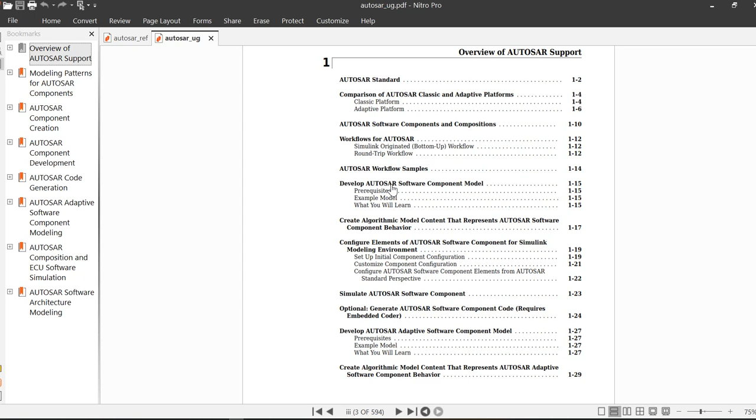Then the AUTOSAR workflow sample, developing AUTOSAR software component models, and the modeling pattern for the AUTOSAR component. Chapter 3 is AUTOSAR component creation, chapter 4 is AUTOSAR component development.

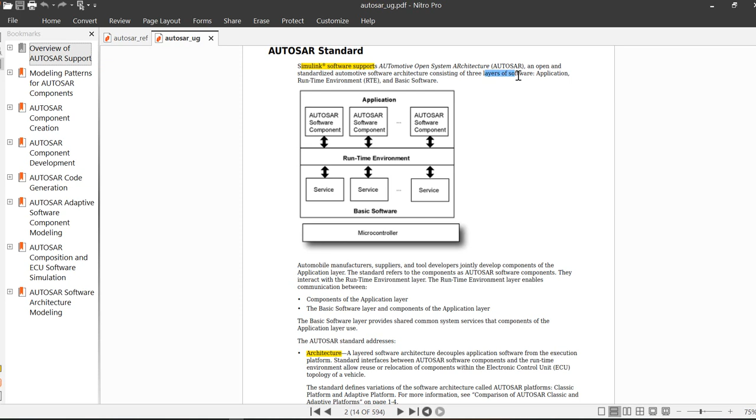Okay, so let's see chapter 1 first, the AUTOSAR standard. According to the website, the AUTOSAR standard means an open and standardized automotive software architecture consisting of 3 layers: application, runtime environment, and basic software. The AUTOSAR standard addresses the architecture, the methodology, the foundation, and the application interface.

So here is the comparison between the two AUTOSAR platforms, the Classic platform and the Adaptive platform.

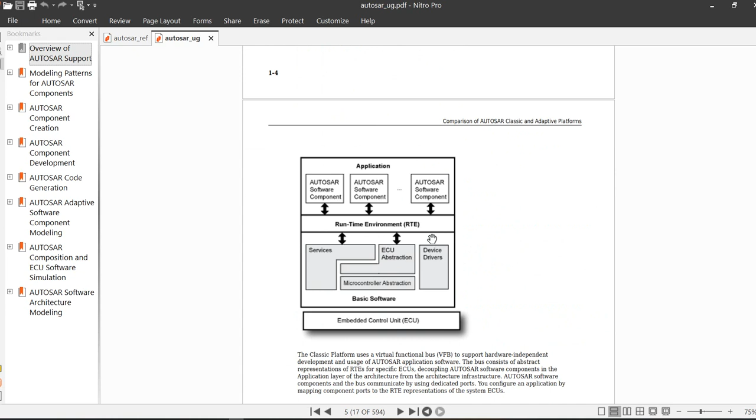Adaptive platform is distributed computing and service-oriented architecture, or SOA. The platform provides high-performance computing, message-based communication mechanics, and flexible software configuration for supporting applications such as automated driving and information systems.

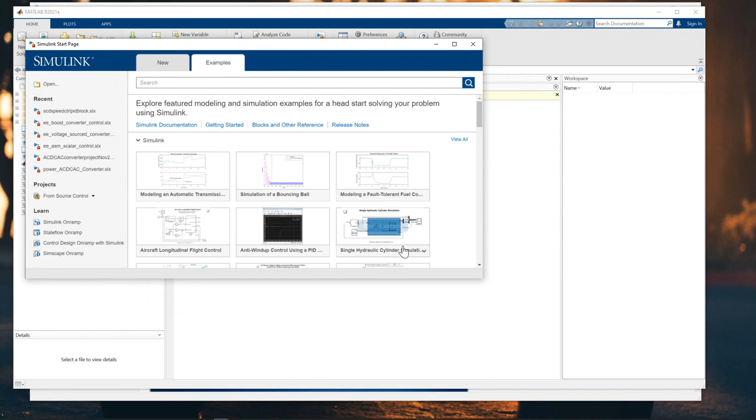Next we will see the AUTOSAR Blockset in the Matlab Simulink software. First we open Simulink, and once it appears you can find the AUTOSAR Blockset here in the new examples. They have the software component, the software component adaptive, and the software architecture. Let's see it after.

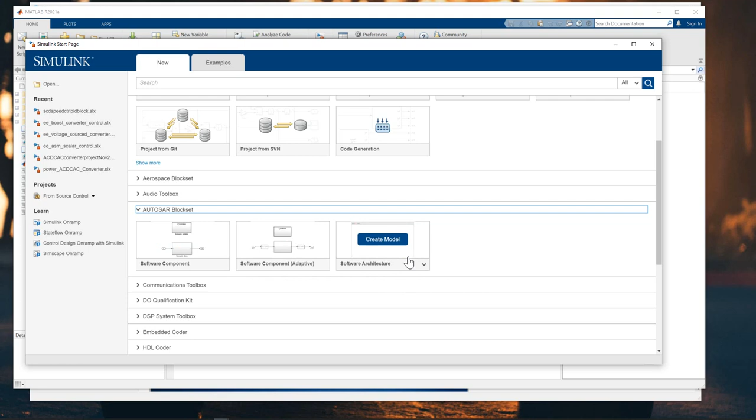One way you can learn is through the documentation from Matlab Simulink. Here you can visit the documentation home, which I'll open in a new tab. Then you go to the AUTOSAR Blockset, and we will learn all the AUTOSAR Blockset topics: get started, software component modeling, adaptive software component modeling, composition and ECU software simulation, and software architecture modeling. You can download the PDF documentation directly from the Matlab software.

You need to enter your email, so I will enter mine. Once you check it, you can see three documentations: the AUTOSAR user guide PDF file, the reference guide, and the AUTOSAR Blockset release notes. You can go here to download them.

AUTOSAR Blockset supports C and C++ production code generation with Embedded Coder, and you can qualify with the ISO 26262 standard using the IEC Certification Kit.

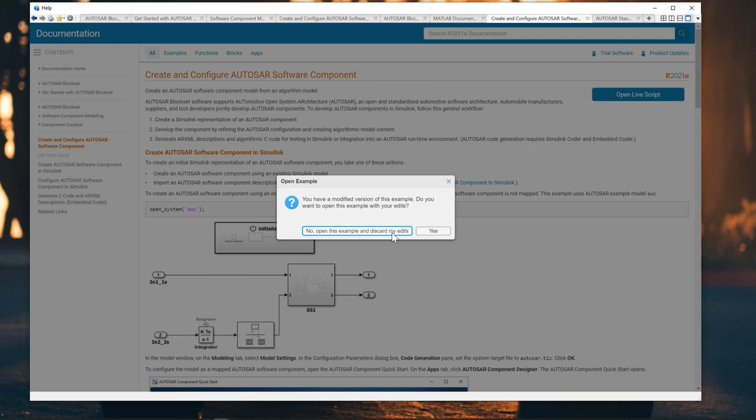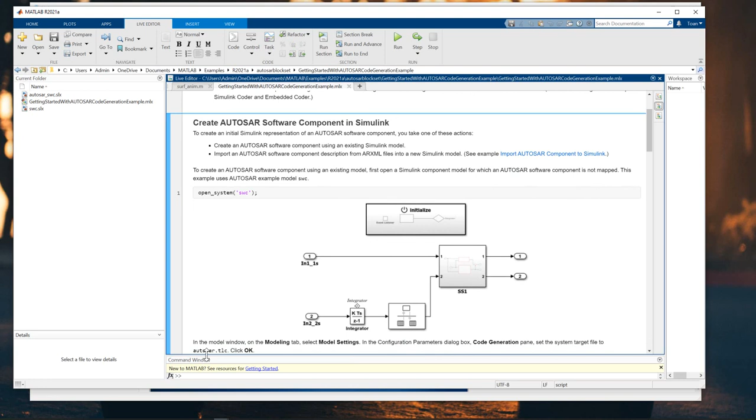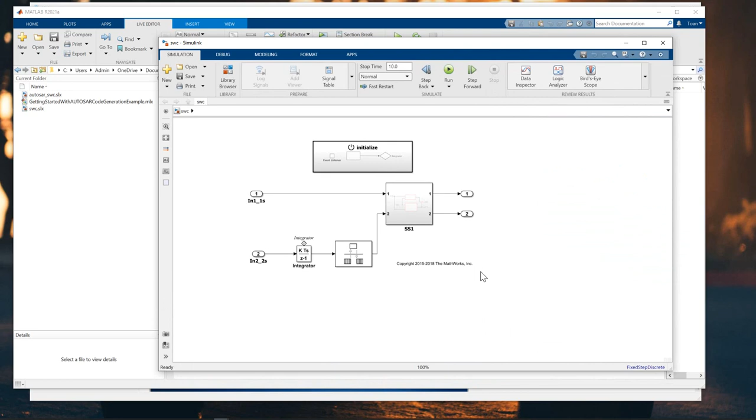Let's open the live script here to see what it offers. To create AUTOSAR, let's open this example and copy-paste it into the command window. After that, we have the AUTOSAR example model, so let's go to the next step.

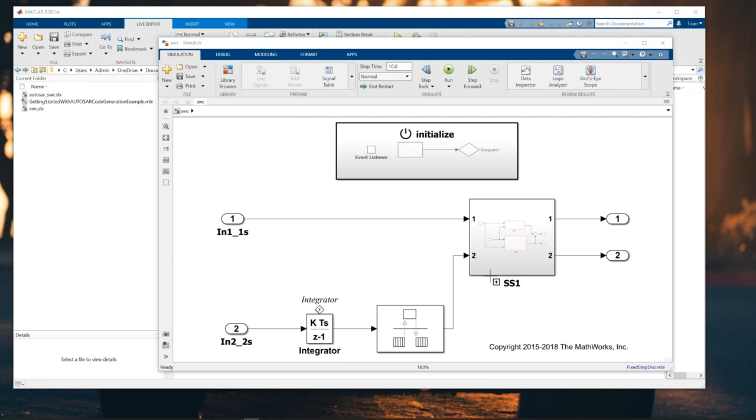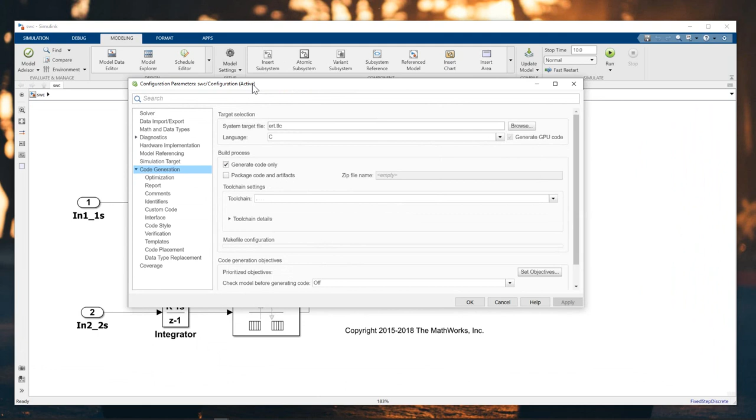In the model window, on the Modeling tab, select Model Settings. Let me zoom out a bit for you. In the model window, I click on Model Settings. In the Code Generation panel, you set the Simulink system target file to AUTOSAR.

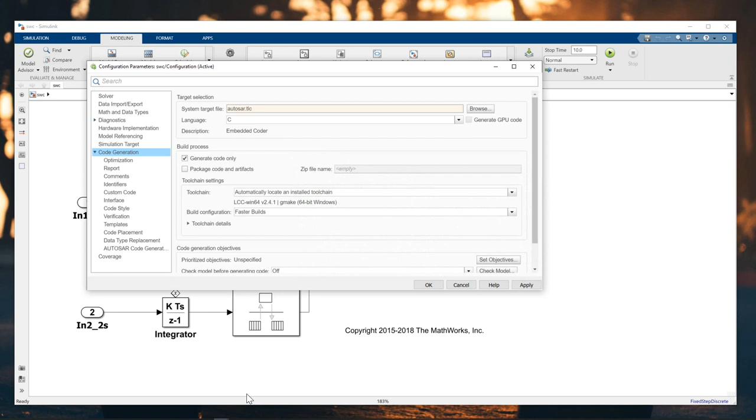I will set it to the autosar.tlc. Okay, and then apply. Okay.

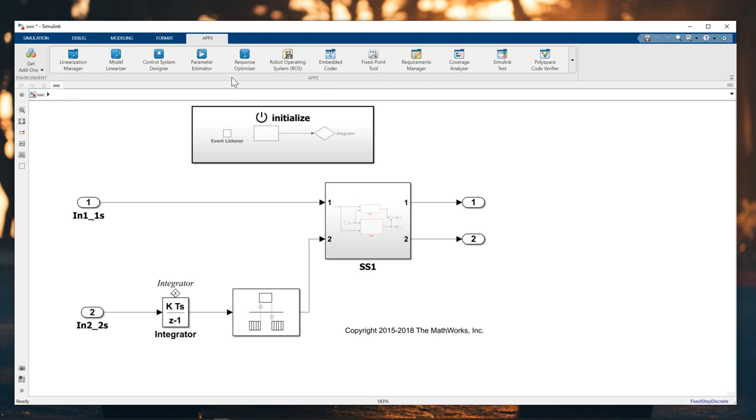So the next one is to configure the model and map the AUTOSAR software component. Open the AUTOSAR Component Designer app, and we're clicking on the AUTOSAR designers here.

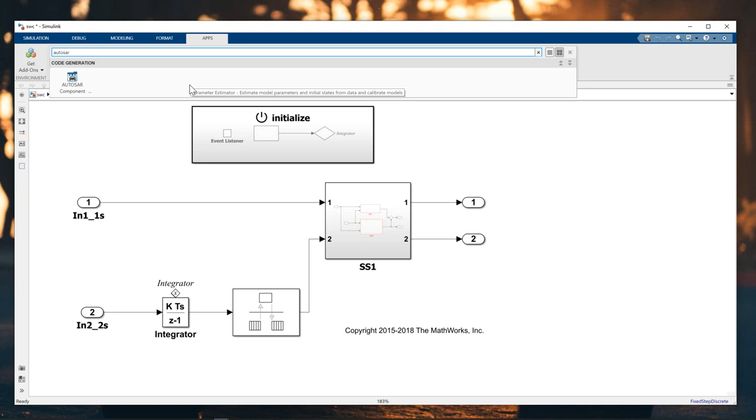I will search AUTOSAR component designer here, and then we have the window AUTOSAR component quick start.

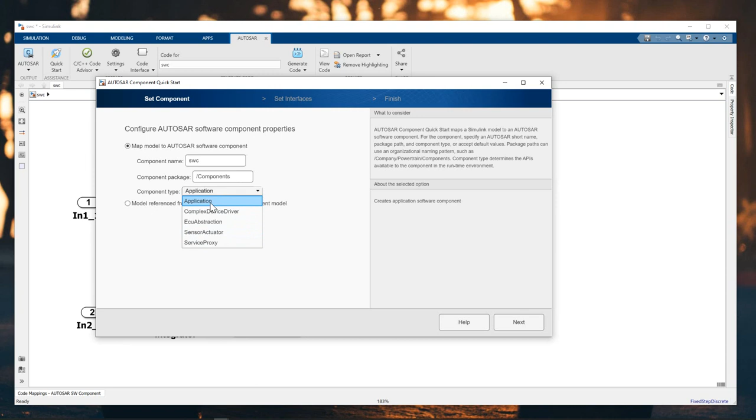So we have the map model AUTOSAR software, the component name, the component package, and the component type is application sensor. So we choose application, and then we click on next one, which is set interface, and we choose create the default based on Simulink model, and then next we are finished. So finally we click on the finish button.

Okay, perfect. So we already configured the AUTOSAR software component in Simulink, and the AUTOSAR code perspective display in our model as a property inspector panel, so you can direct it below, and the code mapping editor.

So let's see the property inspector. We have all information from property, the info, and the execution here, and we have description model.

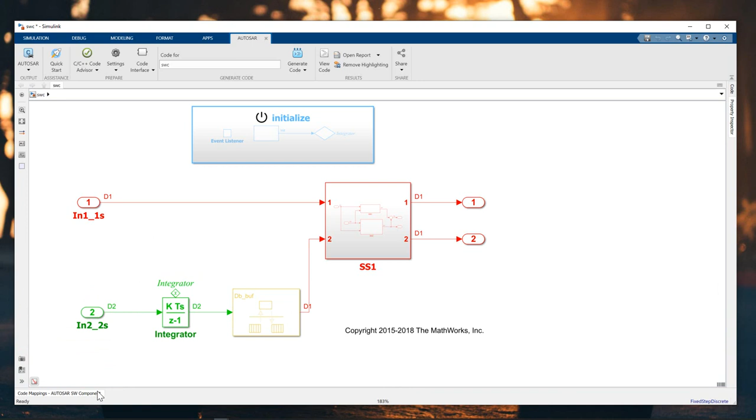And then the next one we will see the code mapping here in the window below. Then I will give it here. Okay, so we have all the code mapping of AUTOSAR software component.

We have function, inputs, outputs, parameter, data store, signal state, data transfer, and function callers. So let's see the function.

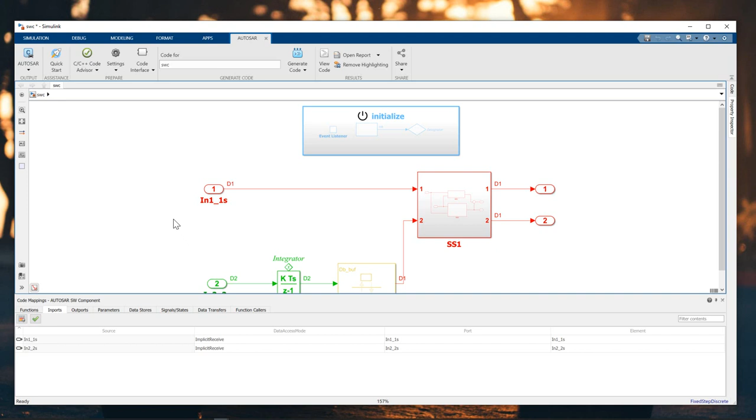The import, we have the two imports. Okay, import one and import two here. And the outputs also we have output one and output two.

Okay, so in the code mapping, we will see the two buttons. The first one is the AUTOSAR dictionary. So in order to configure the AUTOSAR property of the map AUTOSAR software, open the AUTOSAR dictionary.

So you open it, and then we see all the software component.

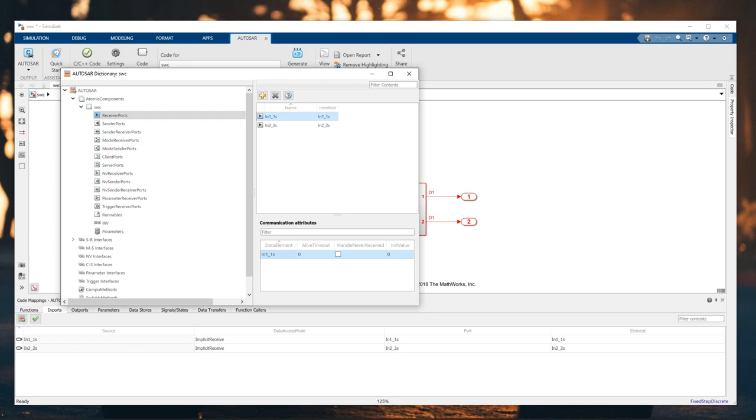So let's see the result. Receive one. Okay, so the AUTOSAR dictionary displays the map AUTOSAR component and its elements.

So let's see what they are. The AUTOSAR dictionary SwAddrMethods and XML Options. So use the dictionary to configure the AUTOSAR element and property from AUTOSAR component perspective.

Okay, so the final one is generate code and description. If you have code there, you can build the AUTOSAR model. To build the AUTOSAR model, it generates AUTOSAR compliant C code and export to the AUTOSAR file, and in the model window.

Press Ctrl B, and in AUTOSAR click on generate code. Okay, so let's do it.

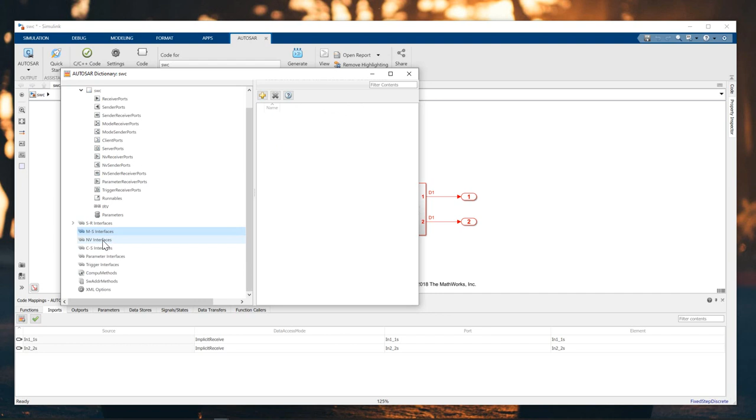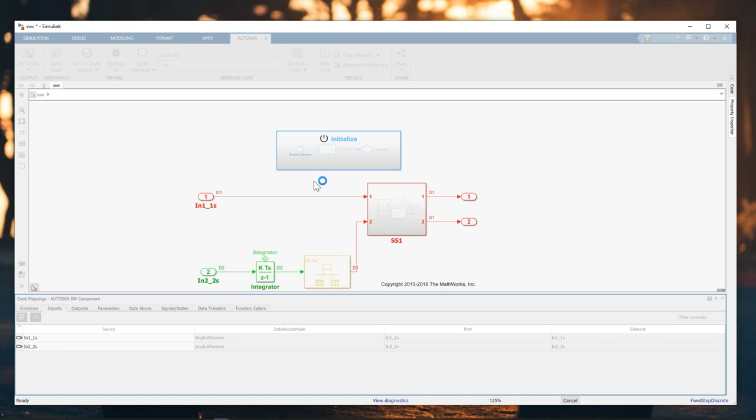Okay, perfect. So after that, we have the swc.c code here. You can see in the right side of my window.

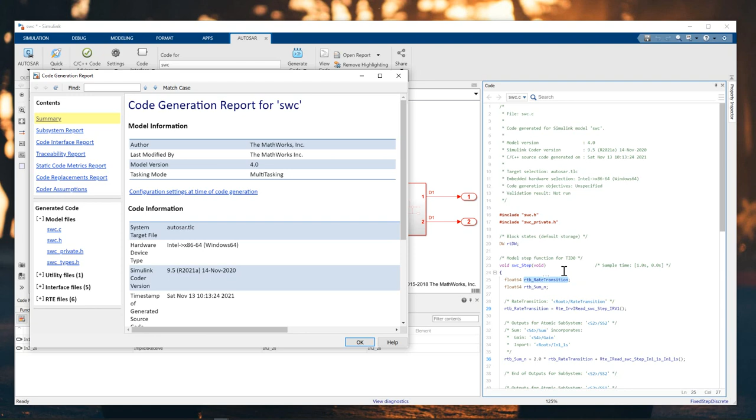So here is a code generation report also. So very detailed, very useful.

Okay, subsystem report. We have code mapping. The following table provides the mapping from a non-virtual subsystem in the model to function or reusable function into the code.

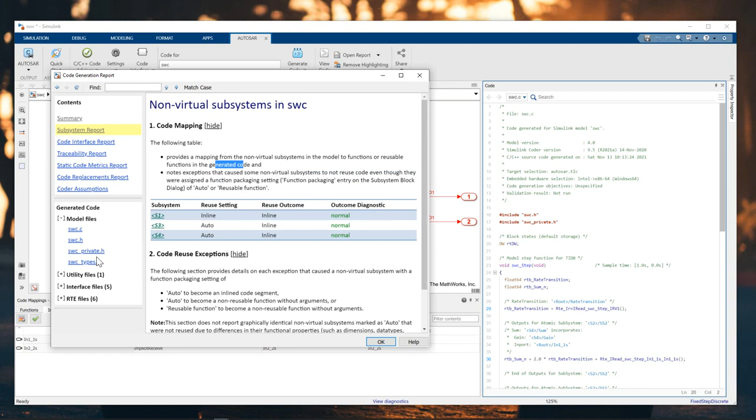And then we have the code interface report. So we have the entry-point function, inport, interface parameters, data store, loaded in the model, of course.

And then we have the traceability report. Very detailed, very useful, I think so.

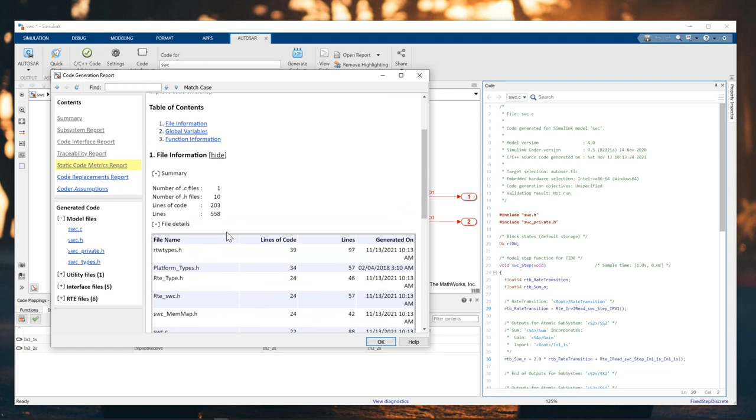And then we have static code metrics report, code replacements report, and code assumption.

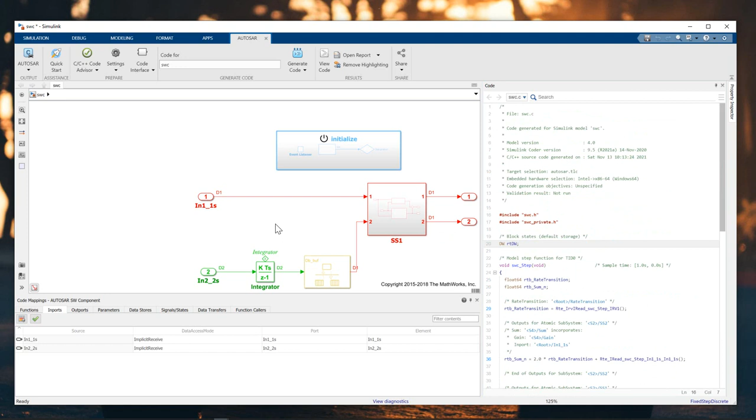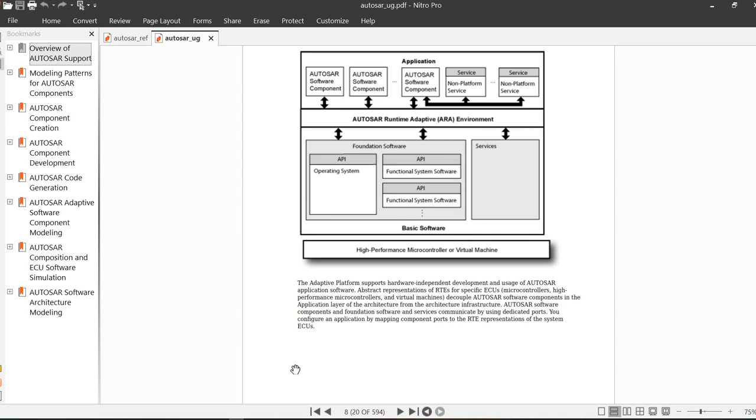Okay, so what you can summarize from what we can learn today: we already looked at the AUTOSAR definition, all the source documentation you can find from MATLAB Simulink, and then we will discuss later, and we ran one simulation from the MATLAB Simulink software.